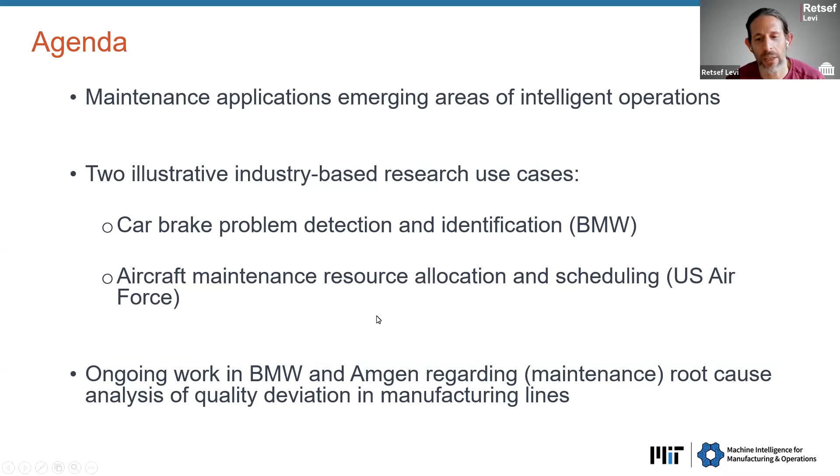And I want to mention that because, strangely enough, in a matter of a few months, two different companies from two different industries came up with the same need. So that suggests that maybe there is something more broadly going on here. And the second thing is that it may be deviating from the usual notion of predictive maintenance. So I just wanted to broaden the scope of what we mean by that.

So let me go very quickly over some applications that I think capture major opportunities when you think about maintenance-related processes and systems. I think one trade-off that data can inform is really the timing of maintenance, right? Where what you usually trade off is how much planned downtime versus unplanned downtime you want to have versus the replacement and maintenance cost.

So the trade-off is, if I wait too long, I might have a breakage in the line that I didn't plan for, and I will have a much more major downtime. And if I'm doing it too frequently, I'm going to create disruptions in the line anyhow, and also pay more cost, right? So that's one

issue. Another issue that emerges, definitely with the maintenance of aircraft, but not only aircraft, is that often maintenance has different modalities that are not necessarily coordinated among themselves. And what you're trying to do is optimize the scheduling of all of these modalities of maintenance so that you minimize the downtime or maximize the time that the line or the machine is actually working.

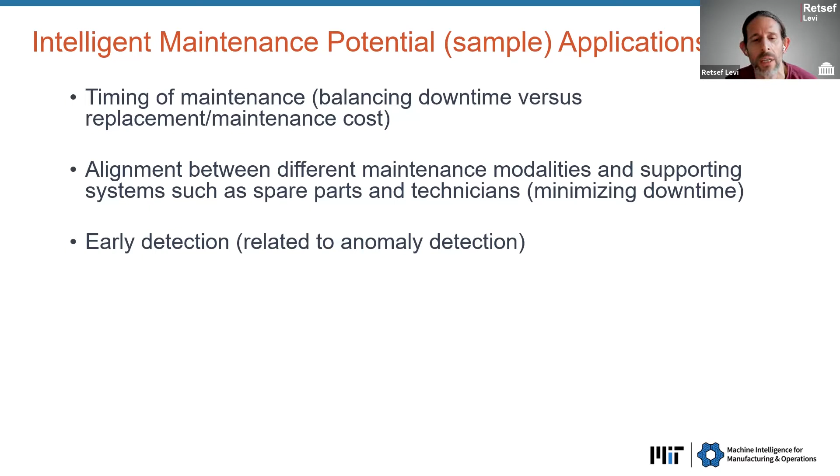And that definitely can be part of the first topic, but not necessarily. It could be also other things, and that has to do with detection, anomaly detection. And finally, one other thing is diagnostics of deviation. So in many cases, especially in regulated environments, when you have a problem on the line, it takes time. It's not only taking time to actually find out what is wrong.

That can happen in any complex system, not necessarily regulated, but sometimes you actually have to adhere to a certain process to show that you investigated the deviation in an appropriate way. And that takes time. It takes human capital, and it also takes time in which often the line cannot work, right? So being able to do that quickly is actually something very desirable. And again, analytics can play a role there.

And finally, maybe a classical problem: often you have multiple assets that you actually maintain, and you have scarce resources. And now the question is which assets to maintain, in what order, so that you actually get the best performance across multiple assets. Okay, so here, unlike the first four bullets, which are mostly something that you can think about at the single asset level for the right definition of asset, the last bullet is really prioritizing across assets.

Okay, so hopefully that explains why I'm really looking at it not as predictive maintenance, but rather as intelligent maintenance, because it has much more than just predictive maintenance. It has elements of predictive maintenance, but it's definitely something broader than that. And I think that there is a good reason why it's an emerging domain of applications, because many of these systems produce a lot of revenue, so that every time that you don't produce, you're actually losing a lot of money, right?

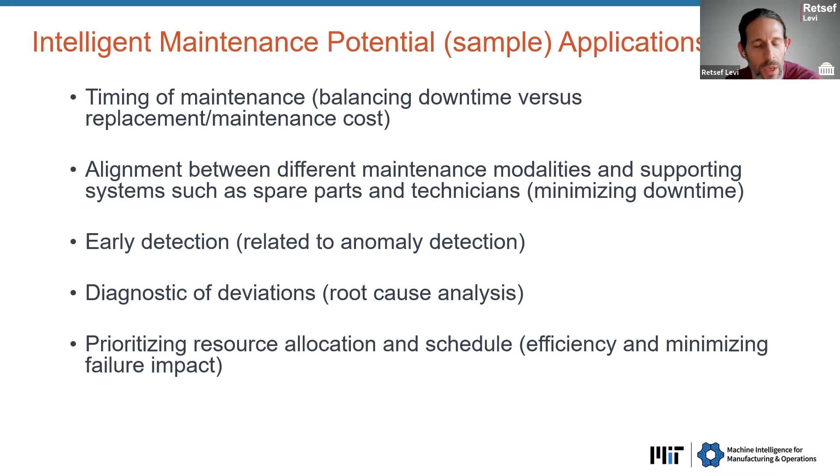So the first example I'm going to talk about is work I've been doing with two Master of Business Analytics students here at MIT with BMW. It has to do with car brake problem detection. And the way I'm going to talk about this is I will first talk briefly about the business impact, and then I'm going to describe, at a high level at least, a methodological approach. And I want to highlight that there will be three major issues there.

The first one is data augmentation. And I think that's sort of a common problem in many settings in which you want to implement something new, and the acquisition of data to train a model is actually pretty problematic. It's a challenge. So to some extent, what we're going to see today is some sort of bootstrapping, but when you actually have to do the bootstrapping in the physical world rather than just generating more samples, right?

And then we're going to talk about noise classification. So the idea would be, I hear different noises from the brake. I want to be able to associate them with typical problems that can emerge. And then finally, we're going to talk very quickly about how I can automate a process like that, so that the part in the recording that is really relevant to the noise will be detected automatically. And again, that's another part of being able to actually use this at scale.

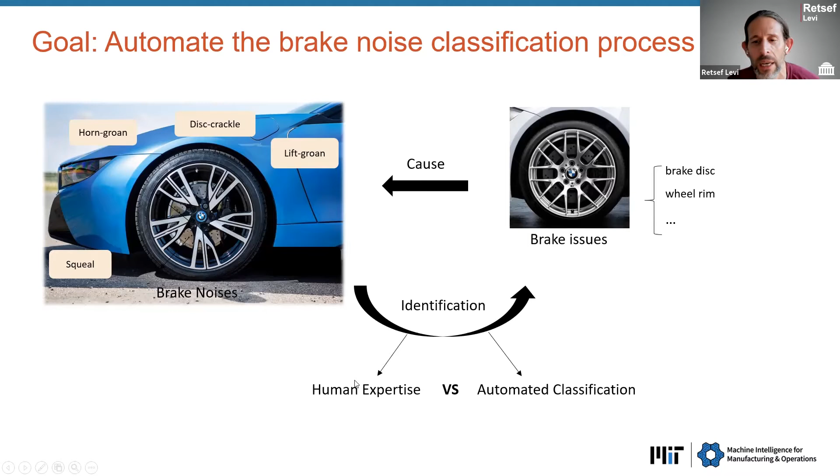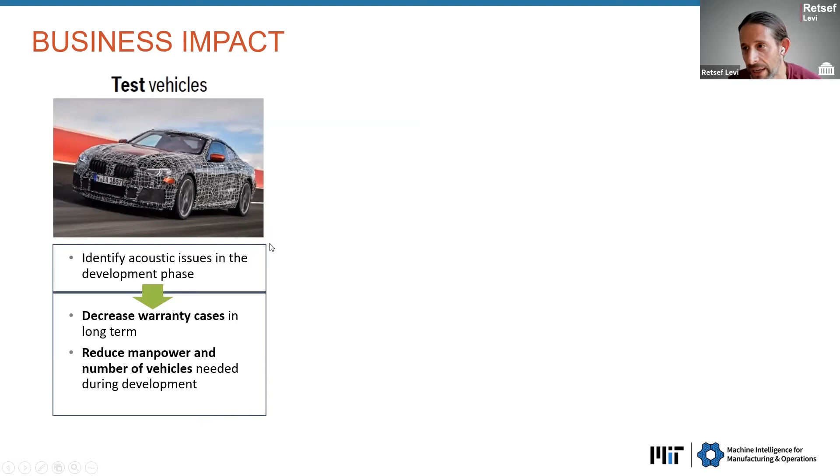And why is this important? Well, this is important throughout the entire life cycle of the car, starting with the development and testing of the car. Cars are being tested quite a bit before they go on the road. And basically, whenever you're missing things in this stage, you're going to have to pay a lot of warranty money down the road. And on the other hand, you want to control the amount of manpower that you invest here.

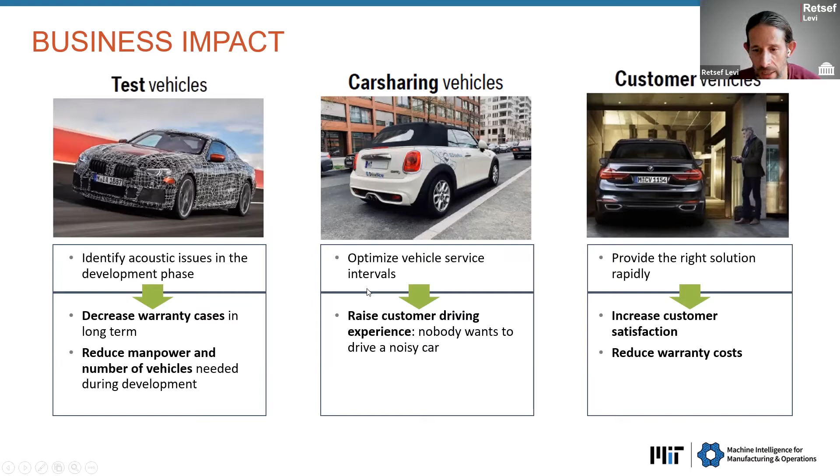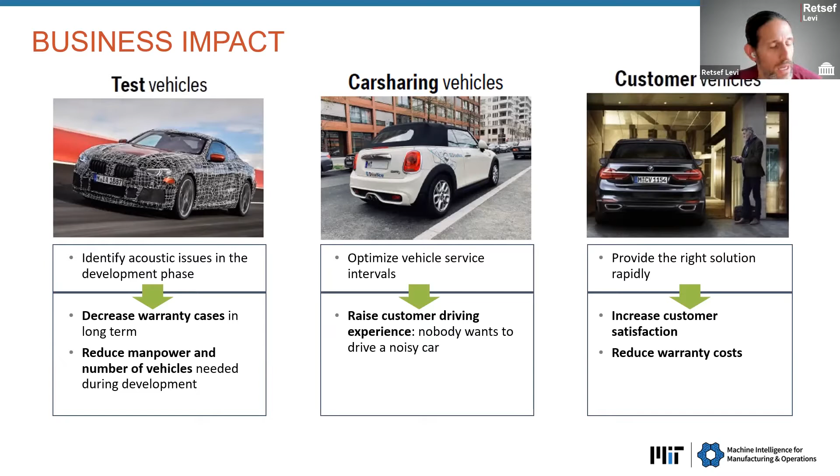And then in the different use cases of how you actually use cars, whether it's a car sharing service or customers buying it, you want to improve the customer experience, and you want to be very responsive to tell a customer, hey, you have a problem with that, let's just fix it, or even initiate an alert to the customer that there is a problem with the car. So for all of these reasons, there are multiple use cases that motivated the company to go in that direction.

And I just want to go over the high level things that we had here. So we started with 180 samples that were recorded in testing cars, right? Cars that test drivers are driving. This was a special setting that was installed there of microphones near the brakes.

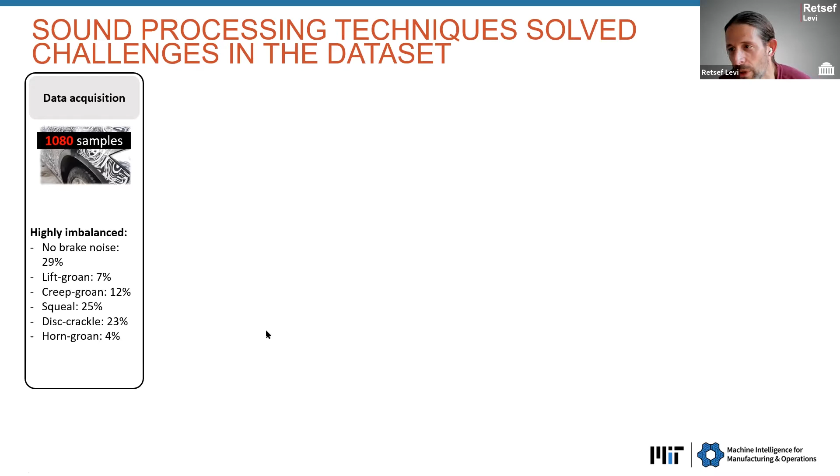It's not clear how you do bootstrapping here, right? Because the input, the sample, is an entire recording. So the question is, how do you do bootstrapping effectively in this setting? And the way that we did that is being able to identify the parts of the noise in the recording and mix them in a certain way based on some understanding of the physics, of what will actually create a reliable sample.

And we were able to bring it up to 3,000 samples that were labeled and retrained and created a more balanced training data. So in order then to actually train the model, you have to remember the recording includes parts that are really not the noise and parts that are the noise, but it's not obvious how you separate the two up front. This is even before you actually classify the noise. So there is one more step here that you need to worry about.

And again, we developed some physical tools to be able to identify the noise and really clean the incoming sample, the input sample into the model. And then there was a feature extraction, using some expert inputs here, and essentially we developed 2 different models that were used to predict and classify the noise.

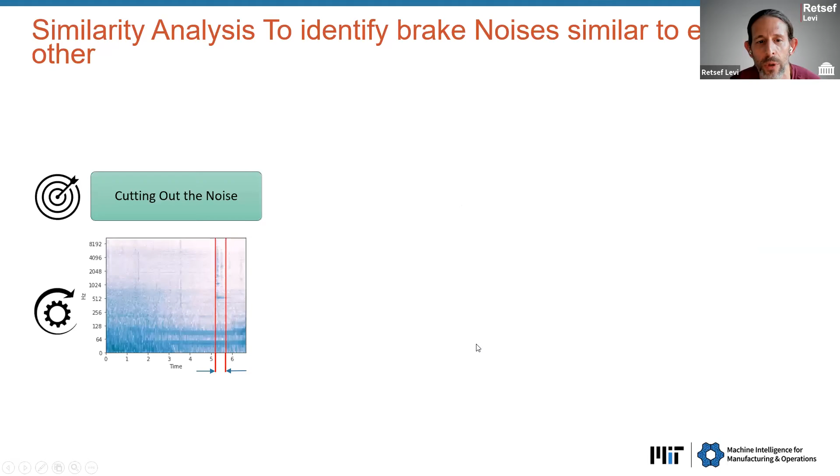actual noise. So what we actually did, we built, using a physical device, a way to automate the noise cutout, right? And that actually led to another idea: as we cut the noise, for the labeled problem, we looked at another approach to cluster new noise, which is based on the distance between that new noise and the noises that were labeled, and that also gave some pretty good accuracy for at least some of the noises, not all of them. So this is less balanced, but may perform quite well on other things.

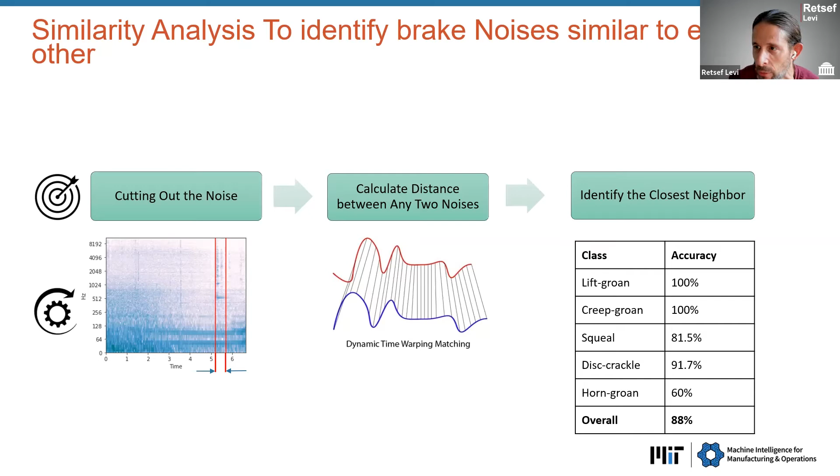Okay, so I'm ready to move to the next example, but maybe that's a good time. Again, this is something that I believe was getting into production within BMW, but I'm happy to answer questions before I move to the next example.

I have a quick question. When you're trying to identify the source of the noise, would you be testing it in a controlled environment like a dealership, or would it possibly be when the car is running, trying to identify if these noises are happening in the background? So would you have to worry about other sounds?

Yes, that's a great question. So I think now you're touching on how you actually extract the noise. Are you going to put internal mics like they put in the testing cars, or are you going to rely on things that are more crude, right? That are maybe more sensitive to outside noises. So that's something that they are going to have to test, and I don't know what the results are.

But the training data was very much from special mics that they put in the car near the brakes. So it was recorded during driving, right? So it was under a real-life environment, but not necessarily the way you would record it ultimately in the application. So that's going to be another phase where we will need to see what that extra noise or lower quality recording will do to the performance of the algorithm. So it's a great question.

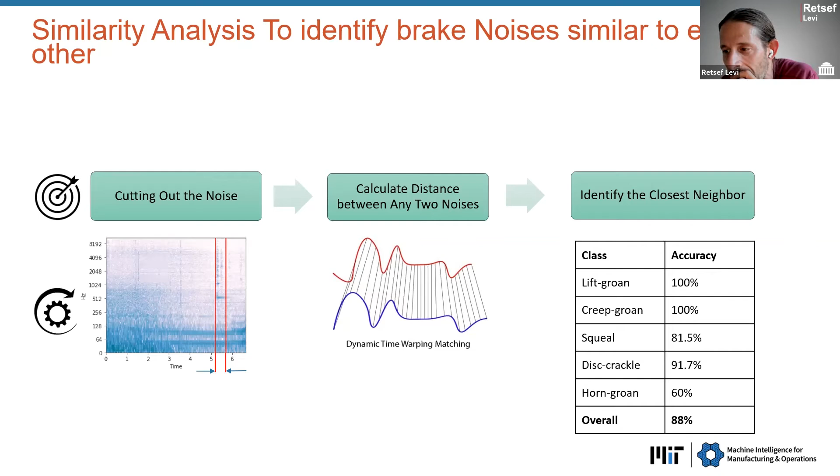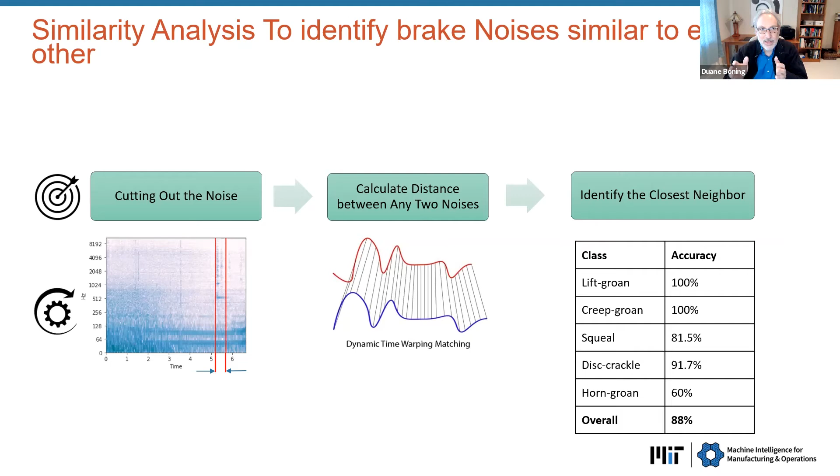I think I have a question, Retsef. A lot of the time, especially in time series data, the key question is how much do you do in the frequency domain and how much in the time domain? I'm not entirely sure what the setup here was. Were you using the frequency domain spectrogram to filter out the noise and then do most of the processing in the time domain on the residuals after you've filtered, or is it a little of both?

So to be honest, I'm not familiar with all the exact details of the feature engineering, but I'm happy to go back and revisit what they did. It was very much working with sound experts that prioritized what they think is telling here. That's how we did feature engineering. It was not like just letting the computer learn that out of the blue, especially given that we didn't have a lot of samples, right? Maybe you can learn that if you have a lot of samples, but with the samples we had, we really had to rely on expert opinions about what matters in the noise.

And by the way, that's probably why the performance is not consistent across all the types of noise, because some of them have a very different behavior in terms of the frequency and the amplitude. Some of them, you just look at it and say, hey, yeah, I can see that something is wrong. And some others, you look at it and they can easily be confused with another noise or with normal noise, right?

So I'm not sure I can answer exactly what it was, but definitely there was a lot of expert opinion going into the feature engineering. Great, thanks.

Anything else? Okay, so with that, let me go to the next example. This is work I've been doing with my colleague Vivek Farias from MIT Sloan, the faculty, and Tom Magnanti, and both PhD and master students from the ORC. And it has to do with the maintenance of aircraft of type F-22.

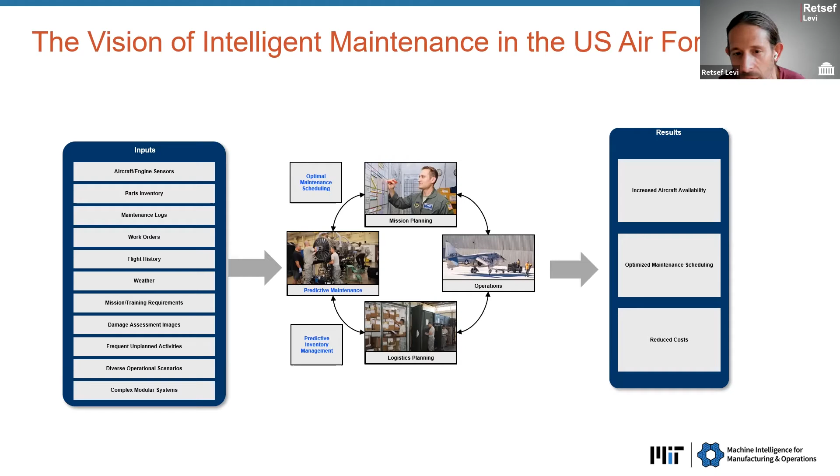And the last thing that I would like to highlight that is special about maintenance in the Air Force is that often what you have here is the combination of maintenance and supply. Often the maintenance involves replacing a part, and these parts are actually quite expensive and scarce. So you have to manage both the supply chain that supports the maintenance as well as the maintenance resources, as well as all the other considerations that we talked about before, maybe in the context of a car.

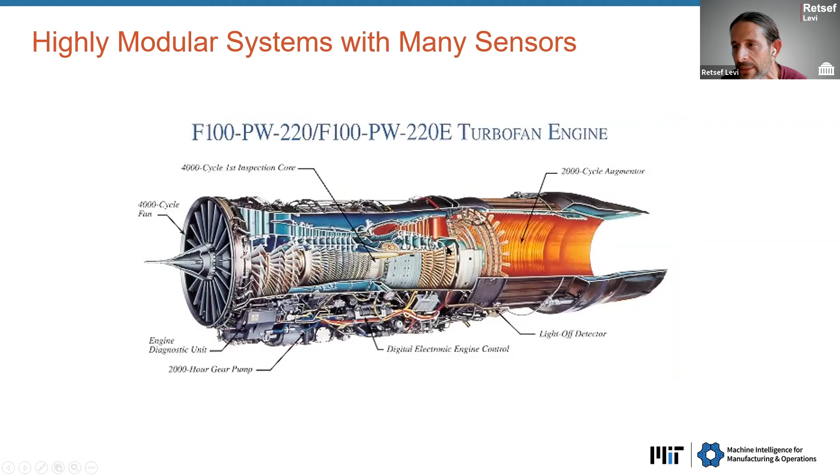And just to make the point here, an airplane engine is a very, very complex modular component. Okay. So back to this particular problem, as I said, these are planes that have special coating, and the quality of this coating is not static. Actually, it changes, and it changes in two directions. As you fly, the plane, under the pressure of flying, of taking off or landing, is getting some scratches, dings, and other damages to the coating, right?

And the quality of the coating is measured through a very complex set of features. We actually relied on a statistic of these features that is called the Signature Assessment System, the SAS score. And basically, there is a software package where you record all the damages of the plane and where they're located, and that calculates for you the SAS score.

And essentially, if the SAS score is below or above a certain threshold, the plane is determined to be not mission capable. It doesn't mean that the plane cannot fly. It's not a safety issue. It can fly for training purposes, but it does mean that if you now have a combat mission, this plane will not be qualified as capable to do that mission. And that's the metric that the Air Force cares about a lot.

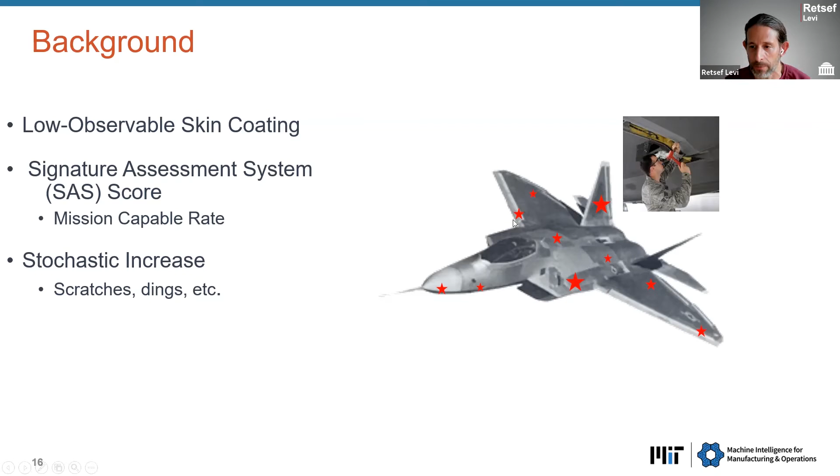Now, how do you actually improve the SAS score? By actually doing maintenance, and there are multiple modalities of maintenance.

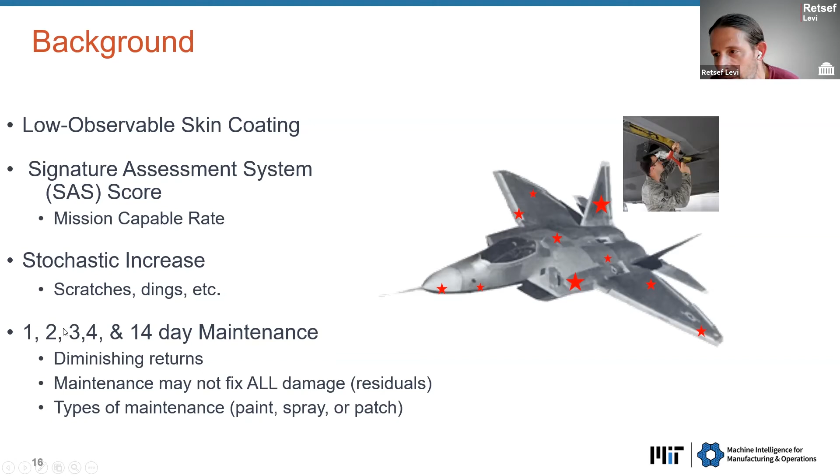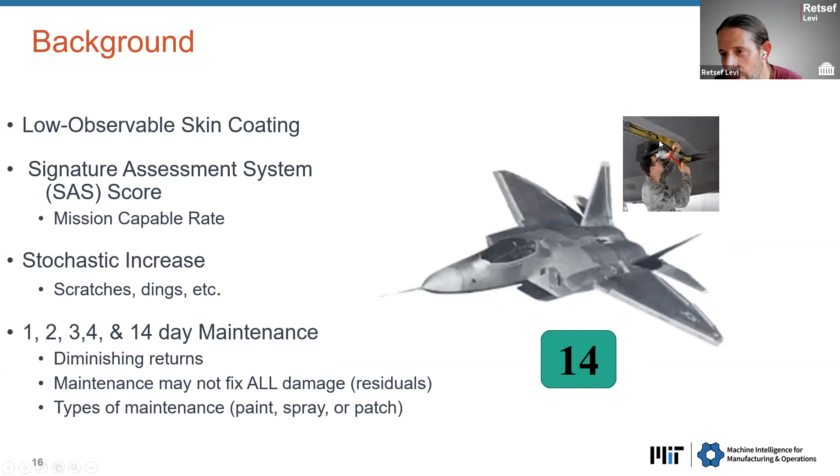And it's 1 day, 2 days, 3 days, 4 days, and then 14 days is basically when you essentially clean all the damages. You kind of reset the clock. So basically, one way to think about it is the more you maintain, the more of the damages you reduce, right? And if you maintain for 14 days, you can think about it as reducing all the damages. And here you can sort of see someone maintaining. So that's kind of the problem.

And what is the actual problem that you need to solve if you have a fleet of planes? What you want to do is to sustain a high mission capable rate, which means that you want many planes to have a low enough SAS score, below a certain threshold. And you want to decide how to maintain these planes under capacity constraints of the maintenance resources, but also with the idea that you really need to fly, which is the thing that takes the SAS in the wrong direction, and you have flying requirements that you can think about as the training requirements that you need to fulfill and satisfy.

And basically, the decisions that you make every day are which planes to fly to satisfy the requirements, and then which planes to put into maintenance and what modality of maintenance in terms of the duration of maintenance. Okay. So that's kind of the overall problem.

Can I ask you a question before you go on? Yeah, sure, absolutely. Do you have a function that relates the flying hours to the change in the SAS score, or do you have to learn this function?

So in a second I will talk about this, but essentially we had a lot of data that we looked at. For the flying missions there is some variability, but it's not gigantic variability. So at a good proxy level, you can say every time I fly, I have some stochastic increase in the SAS. And the way we modeled that, we used the real data that says how the SAS evolved as you flew. So we kind of estimated that distribution.

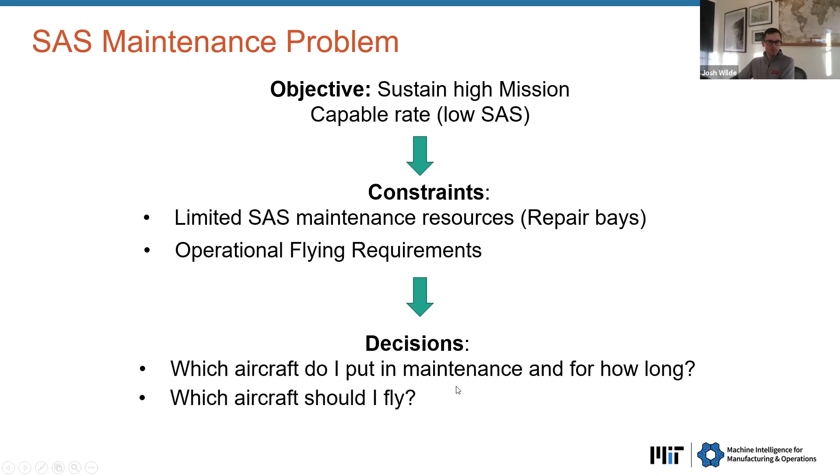Right. But the reason, by the way, why the flying time is not that important is that most of the damage is caused by landing and taking off. So essentially every time you flew, it doesn't matter how much you fly. So it's basically very marginal, right? Okay, makes sense. Okay, so these are the two decisions that we need to make, right?

Okay, so if you want to formulate this as a stochastic control problem, you can easily find yourself in a place where the state space is going to kill you. Why? Because let's say I have 30 planes. The state space will be the state of each one of these planes. That's an exponentially large state space, and trying to solve, let's say, a dynamic program or stochastic control with that state space is going to be

a pretty daunting computation. And not to mention that it's also not very interpretable operationally; it's kind of hard to actually apply in the field. The people that make those decisions are not PhDs, to say the least.

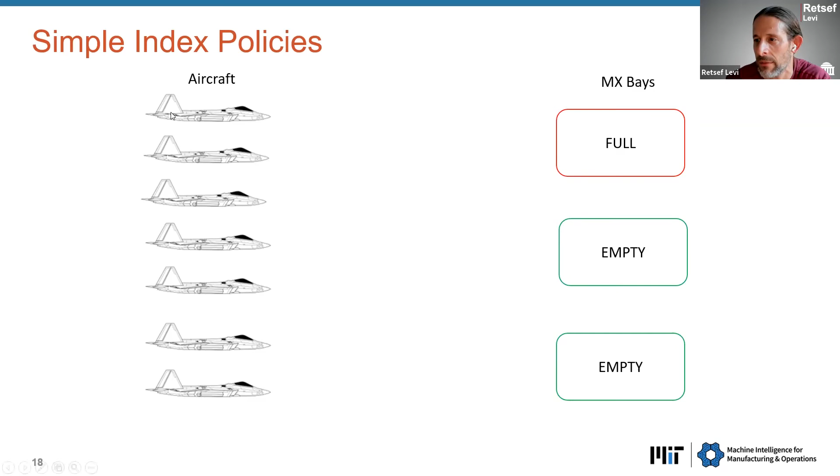So what we thought about is what we call index policies, where essentially they obtain a dimensionality reduction in the following way: for every possible state of a single plane, they give you an index. So the number of indices that you have is linear in the state space of one plane, which doesn't have the exponential nature to it.

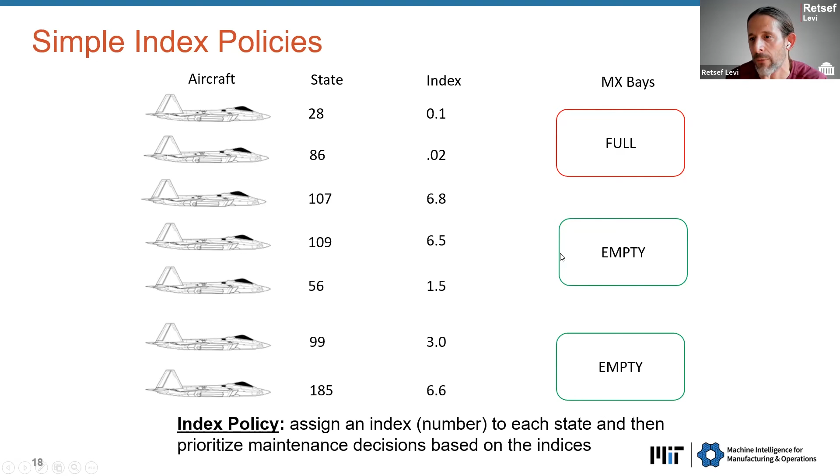And basically, how do you actually make decisions? You look at the index of each one of the corresponding states of each one of the planes, and you look at how much capacity you have, let's say for maintenance. Let's say currently we have 2. If this is the index for maintenance activity, you're going to take the 2 planes with the highest index and you maintain them.

Now, this is kind of a simplified version of the real problem, because we have much more than one binary decision of maintain or not maintain. We basically have maintain and for how many days, and then you have fly or not fly. But you can think about it as generating an index for each one of these activities and then taking the highest index myopically to implement a policy.

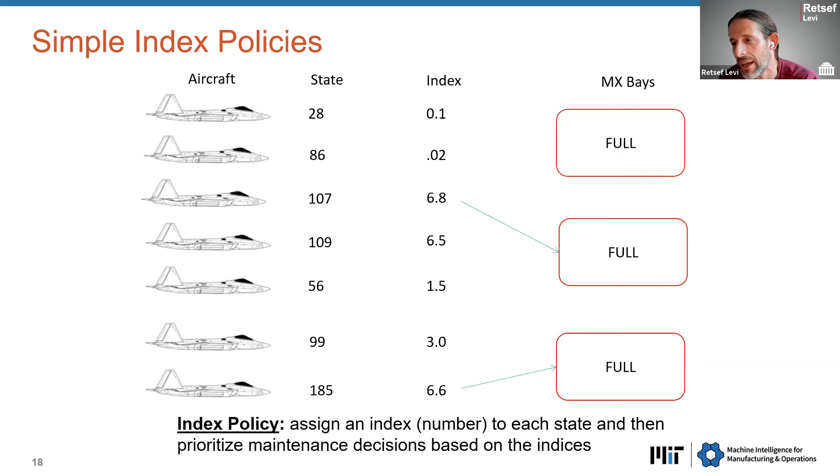What is the attractive thing about this policy? It's a very simple policy; it's very interpretable. You have the index. The caveat is that you need to come up with a good way to create index policies. And in order to do that, we modeled the problem as a very well-known model in learning that is called the restless multi-arm bandit model, and I'm going to explain that in a second.

As I explain that, I want you to think about planes as arms. In multi-arm bandits you have n bandits; think about it like we have n planes, and each arm has a state that can evolve in two ways. One, when I make an action, namely I pull the hand of the bandit, and in the most general form of this model, I might have multiple modes of pulling. Each type of pull will stochastically change the state of the arm.

And what is special about the restless multi-arm bandit? In the regular multi-arm bandit, if I didn't pull and didn't apply any action on the arm, it stays in the same state. In the restless multi-arm bandit that is not the case; it also changes stochastically when you don't do any activity. So if you think about planes as arms, the resources tell us how many arms we can pull.

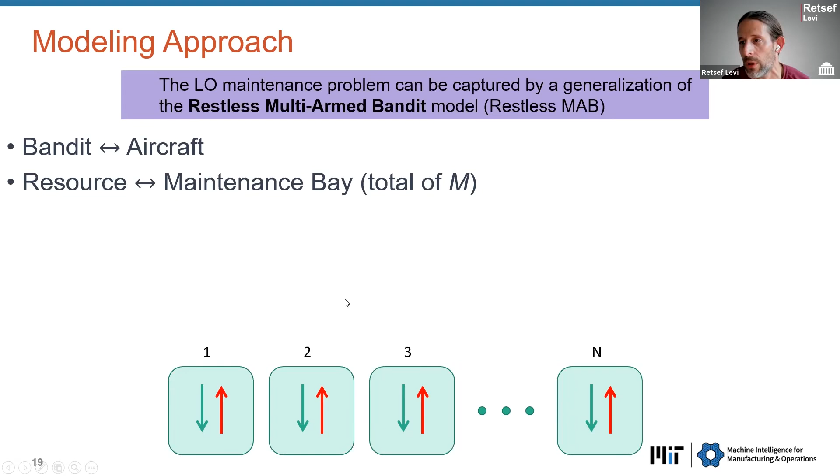And then we define the reward: if the state of the arm is less than 100, which corresponds to the SAS, we give you a 1, because that means the plane is mission capable. If it's above 100, we give you 0.2, which means you can use it for training, but it's not mission capable. And 0 if it's in maintenance, because you cannot really use it.

So what you want to do in the multi-arm bandit is think about the steady-state control of these arms, and how you pull them in order to maximize your reward over an infinite horizon. To some extent, that looks like a good proxy of our model. And what is nice in this setting is that we know, both theoretically and computationally, depending on the exact variant of the model, that index policies are either optimal or near optimal.

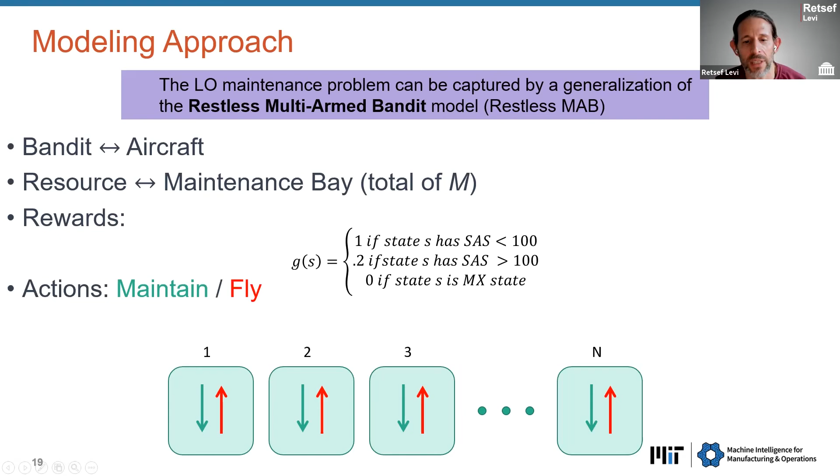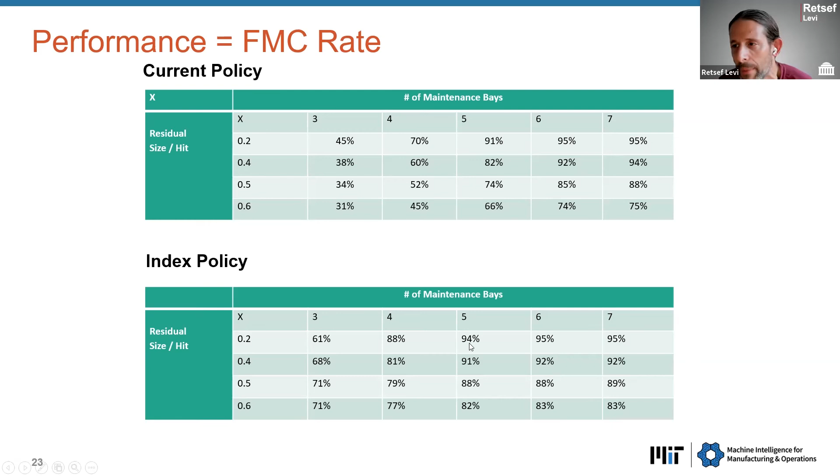But I also want to mention that you could actually take this index policy and translate that, and I'm not going to go over all the rules, but what was nice is that you could translate these index policies to a simple set of rules that you could communicate to the operator. If you just follow these 4 rules, that basically will be implicitly implementing the index policy, effectively speaking.

So the other insight that was important here is that flying decisions are equally important when you want to optimize the system. And that's very interesting because currently the flying decisions are being made by a different organization than the maintenance, right? So essentially the maintenance are saying, hey, I'm going to take these planes to maintain them, you're gonna deal with the rest, and then the people that fly just make random decisions. So one of the insights was, hey, you really want to optimize this together.

Okay, so maybe before I move to the last topic, time to stop and ask if people have questions or clarification. I'm happy to answer.

I have one quick question. If you go back to where you did the formulation for the optimization, I'm just curious which constraint you're using the reduced cost for. How exactly are you going from reduced cost to the indices? So each one of the variables has a reduced cost in the optimal solution, right? From the final simplex table, right? So that's how we do that. Okay, I see. Right. You don't see it on this slide. I should have put another slide to explain that. So sorry about that, but you just look at the final table. Okay. Other questions?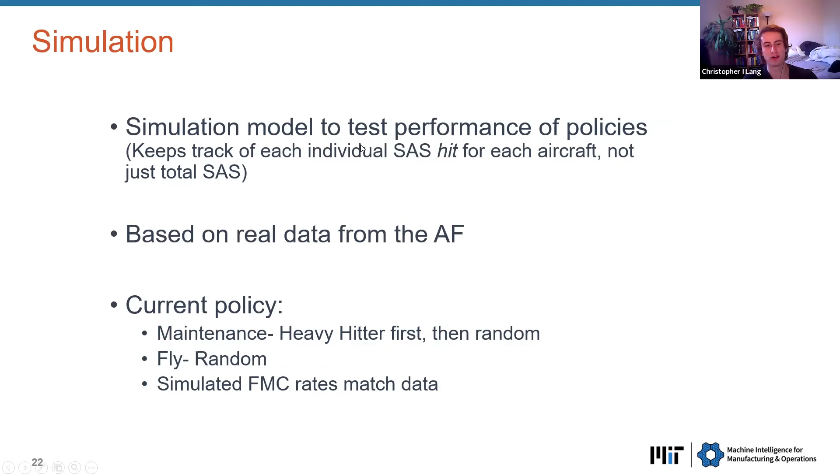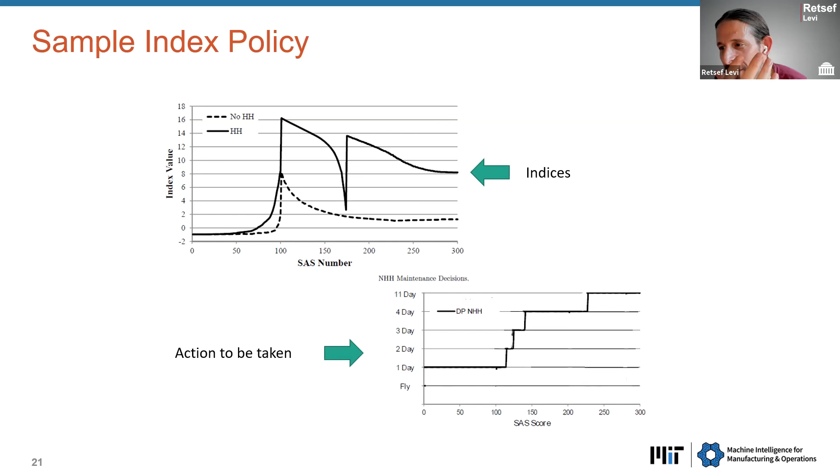So that makes sense, like why it would keep decreasing, but then why would it spike back up? Yeah, because now you are attractive for 11 days, right? So now it's justifying. I see. That makes sense. So it's actually interesting that the optimal policy is doing some smart, non-trivial things, but once you understand them, it's actually quite intuitive, right? Okay. Any other questions?

So I'm going to talk very quickly about ongoing projects. I don't have a lot of results there, but I want to at least pose the problem, because I'm going to talk about the engine case, but almost an identical problem emerged from BMW. And what is interesting is that both of those lines are in products that are highly regulated, where deviations have to do with compliance, warranties, regulatory issues. So you really want to fix problems in the line fundamentally and very quickly.

I want to start with the current process that we're dealing with. It starts with someone observing some outcome that is not good, either a process control outcome or a final product outcome, and they report the deviation. That's what you see here. There is a special electronic form that includes free text parts, both a short description and a long description, but also some more structured classification that has to do mostly with the part and the high-level suspected cause. Then once this is filled, there's some determination if this is a major or minor deviation.